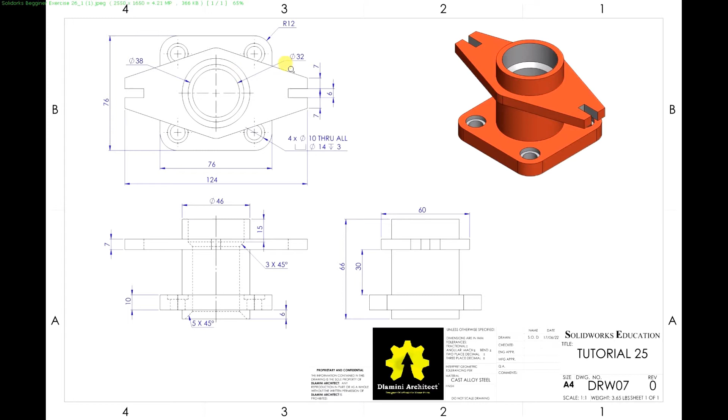Welcome to my channel. Today I will do a simple exercise for beginners.

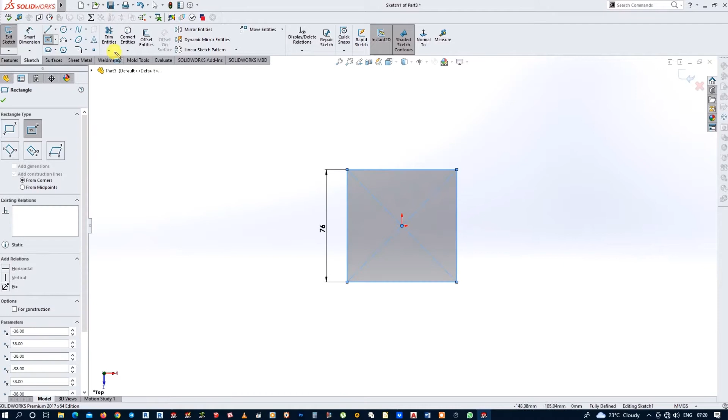Now let's get started. Start a new part file. Now you want to make a sketch on the top plane. Make a rectangle, center rectangle. Make it a square 76 by 76 millimeters. Right. Now I'll put a sketch fillet of 12 millimeters on all four corners. Can I just highlight the whole thing? Say yes to it. Lovely.

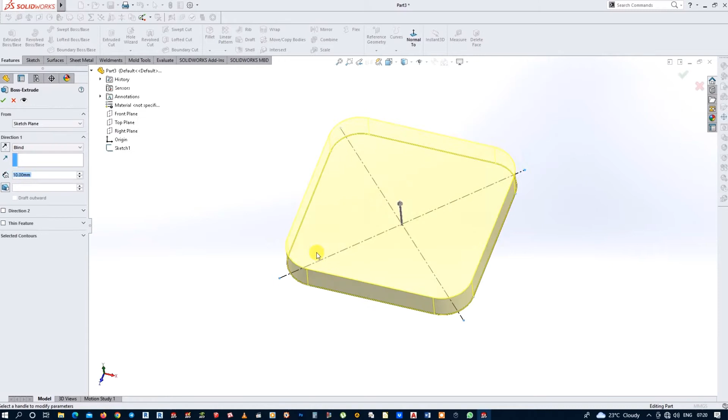Okay. Now close sketch. Extrude. We are extruding up to 10 millimeters. Okay, got our first solid there. I'll make another sketch on the top plane. Make a circle of 46 millimeters. Close sketch. Extrude.

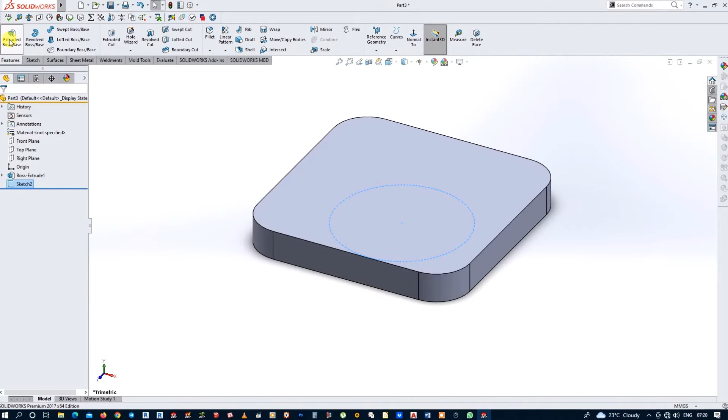Now we're going to be extruding from an offset of 6 millimeters. You've got to go 6 millimeters down and then come up 66. So offset 6 millimeters, change direction. Now go blind 66 millimeters. Click OK. Lovely.

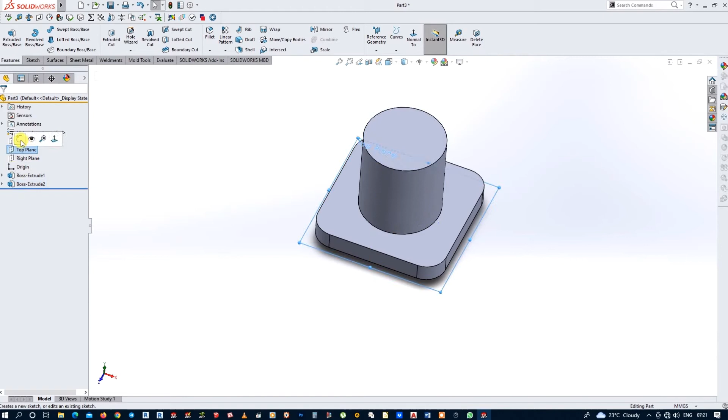Now we make a sketch on the top plane. Make yet another circle. This one is 32 millimeters. Okay. Close sketch. Extrude cut. Make end condition through both directions. Okay, got your hole there.

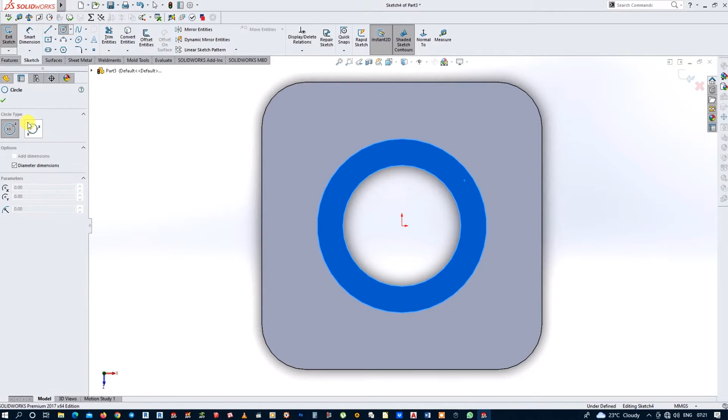Make a sketch on this face. Make another circle. This time will be 38 millimeters diameter. Lovely. Close sketch. Extrude cut. This one will only go down by 15 millimeters. Lovely.

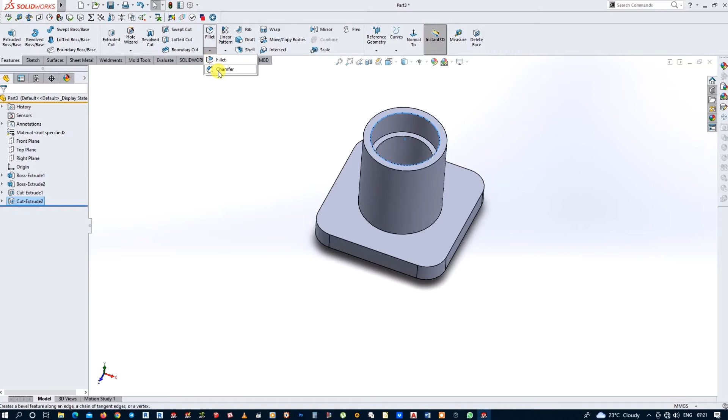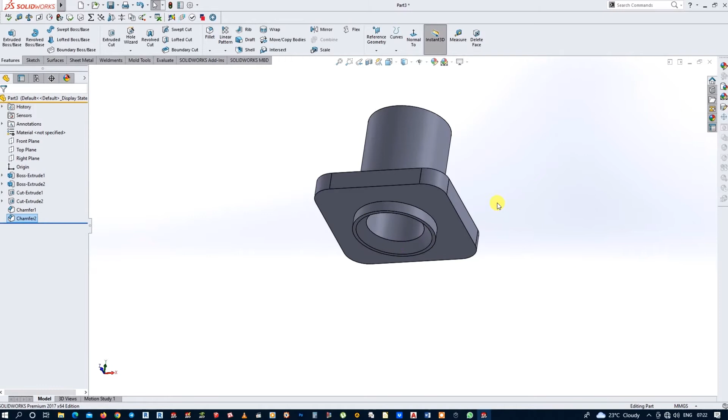Now I want to put a chamfer of 3 millimeters on the top edge there. 3 millimeters. There's your fillet. Chamfer. Now then another chamfer on the bottom edge. This one will be 5 millimeters by 45 degrees on that edge. Beautiful. Now we go for the hole wizard.

You want to make a counterbore hole. Diameter will be 10 millimeters according to the drawing. The counterbore is 14. The counterbore depth is 3 millimeters. And end condition will be through all.

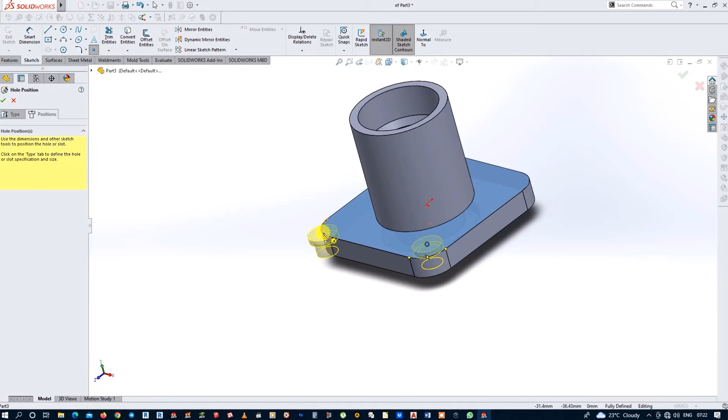Position. Click this face. Now if you hover on the edge of the arc, the center will wake up. Hover. There's your center there. If you hover there, you find the center. One last time. Hovering for the center. There are 4 holes. Okay. And my holes are in there.

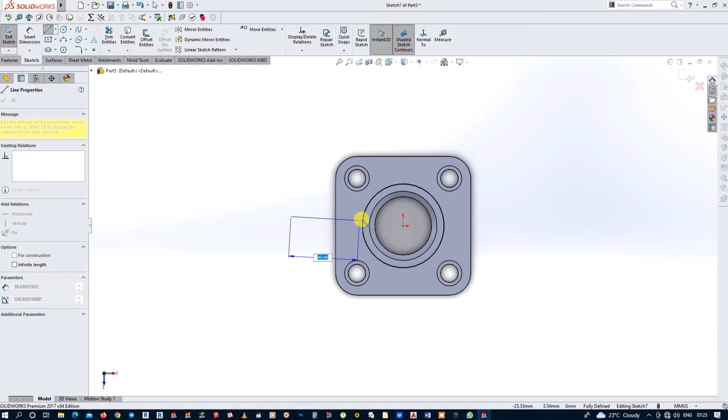Now make a sketch on this face. Just get a line tool and follow along. We're just going to first use convert entities to bring this circle into our current sketch. And just do a couple of lines. We'll define it, try and keep it horizontal. Another line, go up, go that way at an angle. Just stay where it meets the midpoint. You can leave it there.

Now, because I want to mirror this thing along, I'll need a center line. Center line. Not you. What are you doing? Center line too. Line from there to the center. And then that direction. Lovely. Now select these lines. You want to mirror them across now so you get something symmetric. There's a mirror tool at work. Let's get some dimensions going.

That will be 7 millimeters. From here to the center is 3 millimeters, because we need 6 for the whole thing, so we need 3 from the center. From here to the origin is 30 millimeters. And then that to that will be 124 millimeters. Now our sketch is fully defined.

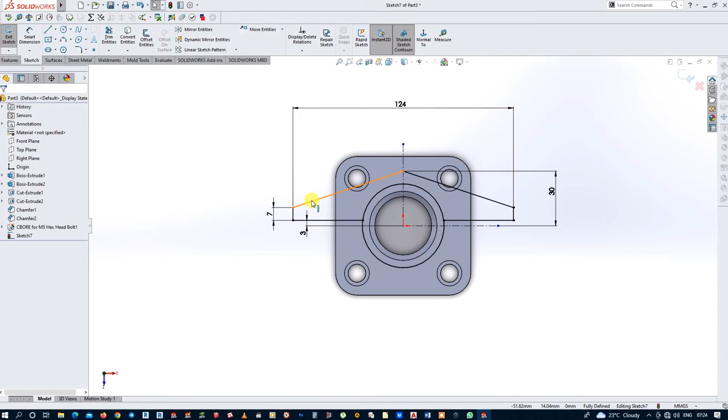Now you select all these lines. Now we want to mirror them across. We need the same thing in the bottom. Zoom in to get that one. Lovely. Center line. Use the mirror tool. Now you can, oh, you missed one there. You just throw it straight up. Line tool. Bang bang. That's what I'm talking about.

Get the line tool again. Just make this tick here. Join this up. And the distance from this edge to my new line there is 13 millimeters. Now select this line and the center line and click the mirror tool. It's going to get mirrored automatically.

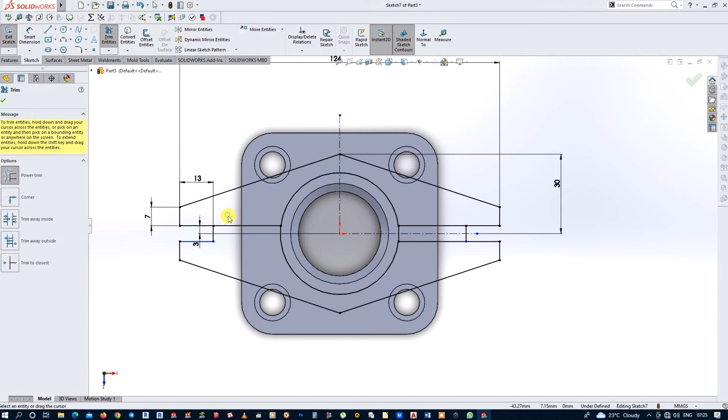Let's clean up here. Let's trim this thing. Trim that. You can trim this. Trim this. Trim that. Okay, now my sketch is not defined anymore. Just select this line and that line and give them a collinear relation. Now my sketch is fully defined. Close sketch.

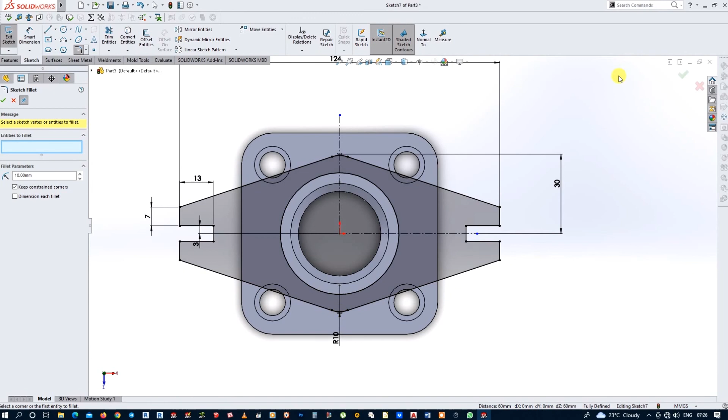Oh, I missed one. I need a sketch fillet of 10 millimeters on those sharp edges there. Lovely. Close sketch. And extrude. Now we'll be extruding from an offset of 30 millimeters because we need this thing above this face. So extrude from an offset of 30 millimeters. Lovely. Now this thing is going to be 7 in thickness, so blind 7 millimeters.